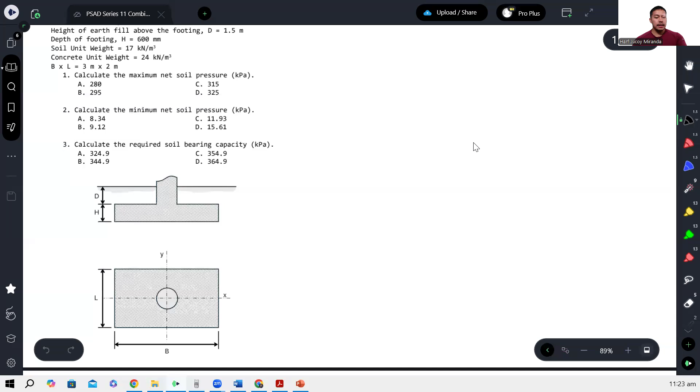For the dimension, it is 3 meters by 2 meters. This side is 3 meters, this side is 2 meters.

The first question: calculate the maximum net soil pressure in kilopascal, then find the minimum soil pressure and the required soil bearing capacity.

Actually, this is just an application of the combined axial and bending formula from strength of materials, to find the maximum and minimum soil pressure.

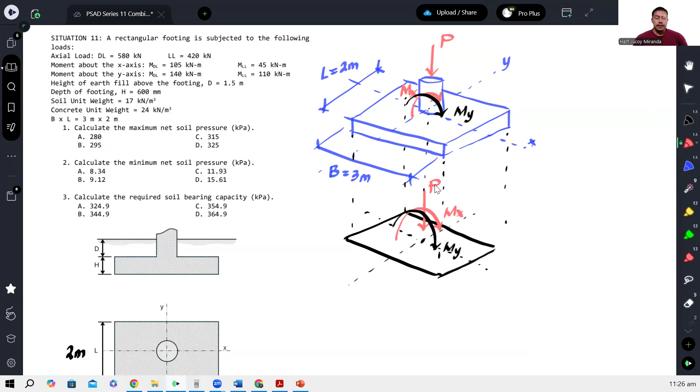So, well, that is just a visualization.

But if we look at our combined axial and bending formula, the stress equals... our sign convention here is positive for tension and negative for compression. So we have force over area due to the axial action, plus or minus the bending moment terms.

So we have bending moment Mx. When bending is about x, your measurement of c is along y. And when bending is about y, the measurement for c should be along x.

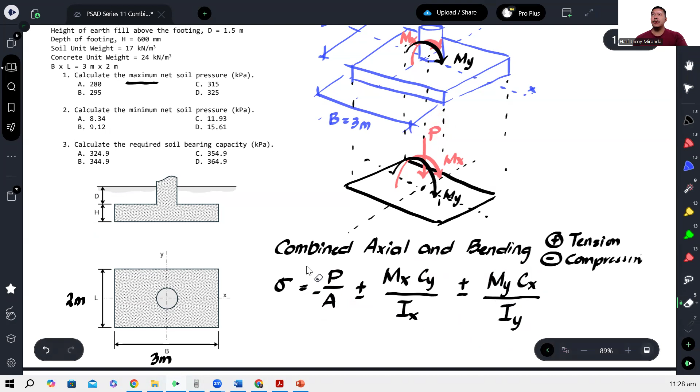Ito yung compression side, tapos ito naman yung tension side. Kapag naman ang pinag-uusapan natin is moment about X, ito naman yung compression side, ito naman yung tension side. Ibig sabihin, this is under compression, itong upper half, tapos yung lower half is under tension. Ibig sabihin, ang portion na kung saan parehas compression yung moment is itong portion na to. Yan yung common na puro compression yun nandyan.

Natutunan natin na sa formulang to, habang mas malaki yung C, mas lumalaki yung stress. Ibig sabihin, gusto kong malaman nasaan sa portion na to yung pinakamalaki yung C for both axes, so that we can produce the maximum compressive stress. Madali lang malaman yon kasi kung ang pinag-uusapan natin is itong moment about Y, yung C mo dapat ito sa dulo. Tapos yung moment about X naman, yung C mo dapat itong nasa dulo din. Ibig sabihin, itong dulo na to, dyan mapoproduce yung maximum stress, maximum compressive stress.

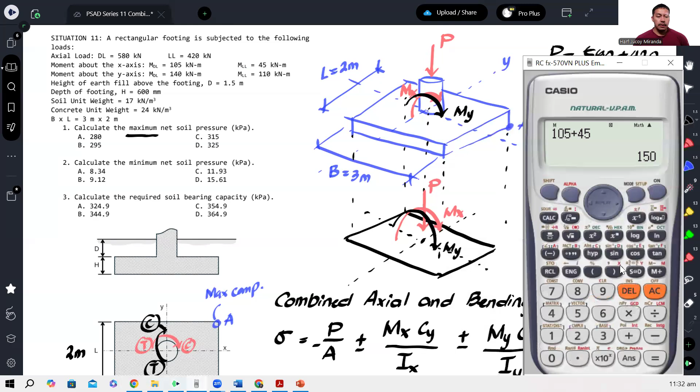I-add lang natin yun. So 105 plus 45, that's 150 kilonewton meter. And then para naman sa y-axis, we have 250 na pag pinag-add 140 plus 110, 250.

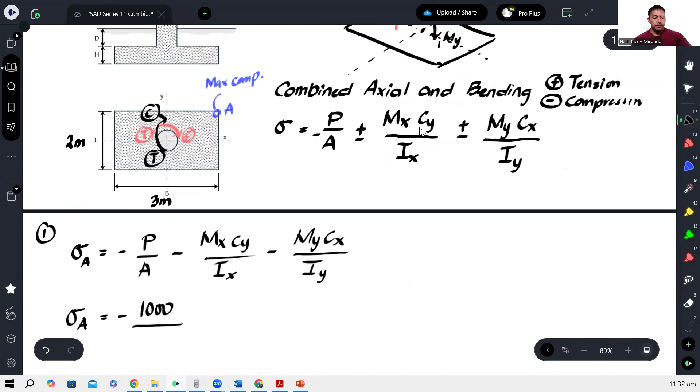Ayan. Okay, so yan ngayon yung mga i-apply natin. Alright, so lagyan na natin. Stresses at A would be negative 1,000 over area. Of course, area nung bearing area, yung contact area ng soil at nung footing, which is also yung area ng footing. So, bali ano lang, 3 times 2. Okay, minus, so kilopascal ito, kilonewton per square meter. Minus yung Mx, 150.

Kapag ang moment natin is about X, ganito lagay natin. Ito ngayon yung axis of bending natin. Ang moment natin pag ganito, ibig sabihin, yung C natin ito. Kasi ito yung corner eh. Yan yung A eh. So, ibig sabihin, yung C natin ito, yan yung CY. Di ba, ito ay 2 meters by 3 meters. So, ibig sabihin, yung CY natin would be 1 meter.

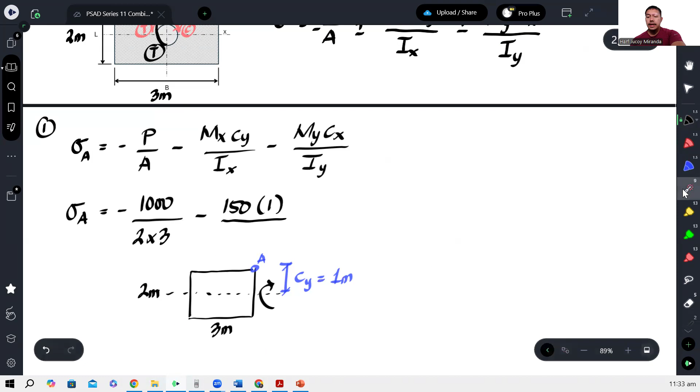1 over, okay, ano yung moment of inertia? Tandaan nyo, ang formula lang naman natin ng moment of inertia kapag rectangle ay BH cube over 12. Ang naka-cube doon palagi is yung dimension na perpendicular sa axis of bending. Ito yung axis of bending natin, so ito dapat yung naka-cube. Tapos ito yung hindi naka-cube. Yun yung tatandaan natin. So, 3 times 2 cube over 12.

Minus, punta naman tayo sa bending or moment about y-axis. Ito ay 2 meters pa rin, ito ay 3 meters pa rin, pero ito na yung axis of rotation natin. So, ito ngayon yung moment natin about y. So, ito yung corner na hinahanapan natin ng stress. So, this time, yung C natin, isusukatin natin mula sa neutral axis papunta dun sa point. So, Cx natin should be 1.5.

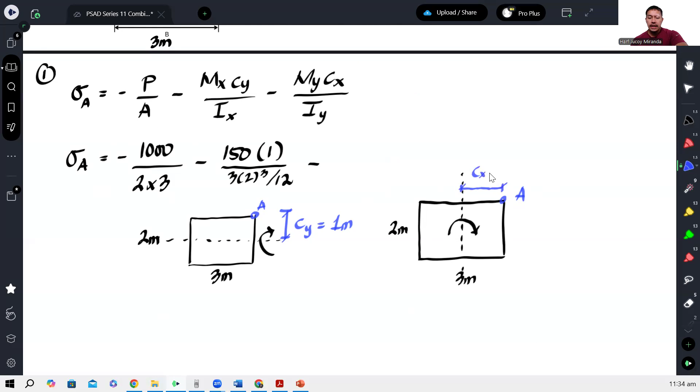Okay, so we have, ilan to? Baba ko lang to, medyo napataas. Ayan. Okay, so ilan to? So magiging ang moment natin about x about y is 250. Okay, so 250 times 1.5 over, this time, ito yung axis of bending natin. So ito dapat yung naka-cube. Ito dapat yung hindi naka-cube. So we have 2 times 3 cube over 12.

And from here, we should be able to calculate for the stress at A, which is we are expecting na yan din yung maximum stress. So, hindi ko na lang lalagay negative kasi lahat naman sila ay mag-a-add. So, para lang mabilis.

150, hindi ko na lalagay yung 1. 3 times 2 cube over 12. And then, we have 250 times 1.5 over 2 times 3 cube over 12. Okay, and that gives us 325 kilopascals.

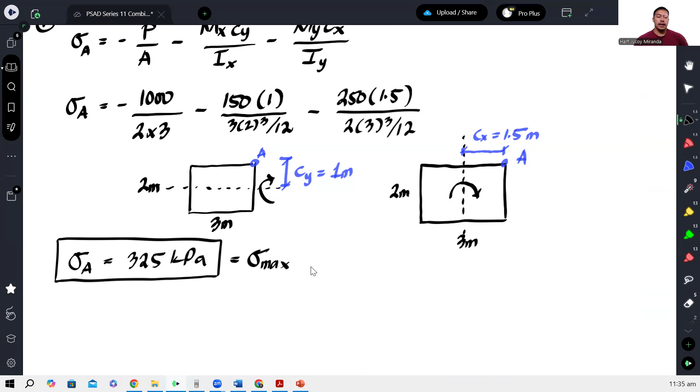So this is already our maximum stress ng soil, no? Or Qmax. Yung iba ginagamit Q, pero parang same lang 'yon. Okay? So 325. Next, calculate the minimum.

So ang minimum naman is baliktad lang nung analysis natin kanina. Okay? Once again, itong P na to, compression pa rin 'yan. Pero hahanapin natin ngayon yung corner kung saan merong tension, no? Kasi ibig sabihin kapag may tension, magpa-plus ito. So mababawas 'yun dun sa compression. Okay? At dahil doon liliit yung soil stress.

So nasaan na corner 'yon? So kung i-analyze mo for bending with respect to x, ito yung tension side. For bending with respect to y, ito yung tension side. So ibig sabihin yung common sa kanila itong corner na to. At yung pinakamalayong corner, yun yung pinaka-intense yung tension due to the bending moment.

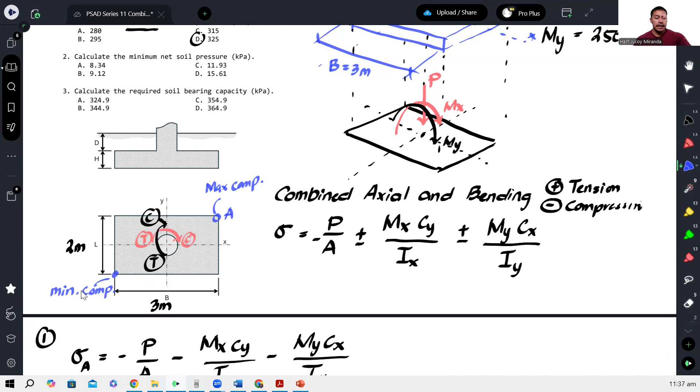So therefore, itong corner naman na to, yung i-analyze natin, no? Dito naman minimum yung stress, no? Or yung compression, kasi tension side yan pag bending, no? So tawagin natin na corner B. Okay, so this time, number 2, kumpitin lang natin yung stress sa corner B.

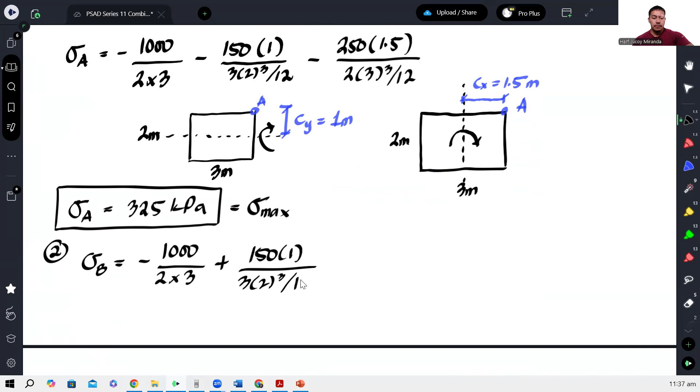Okay, actually, ito lang din lahat yun. Gagawin lang natin itong plus. So negative 1,000 over 2 times 3 plus, kasi tension na tayo dun sa B. And then plus ulit, kasi tension na rin ito dun sa B. Okay, and the answer here will be our minimum stress. Okay, so gawin ko na lang itong negative. So that gives us negative 8.33, that is under compression.

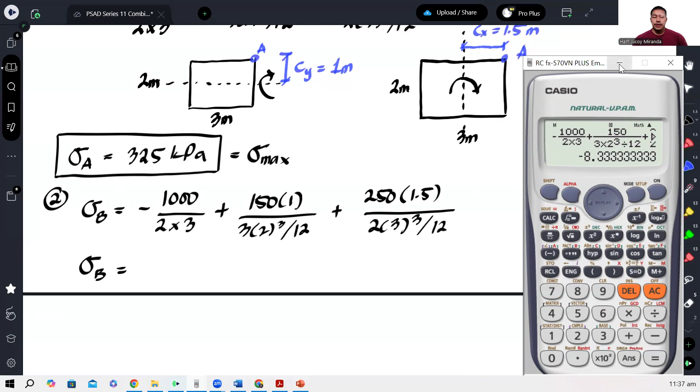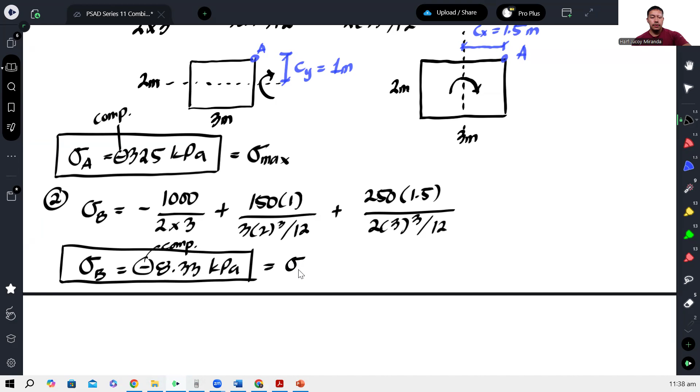So nga pala negative ito, no? Kasi ibig sabihin lang ng compression. Okay, so ito rin negative 8.33 kilopascals. Again, ang ibig sabihin lang nito ay compression. So ito ngayon yung minimum stress ng soil.

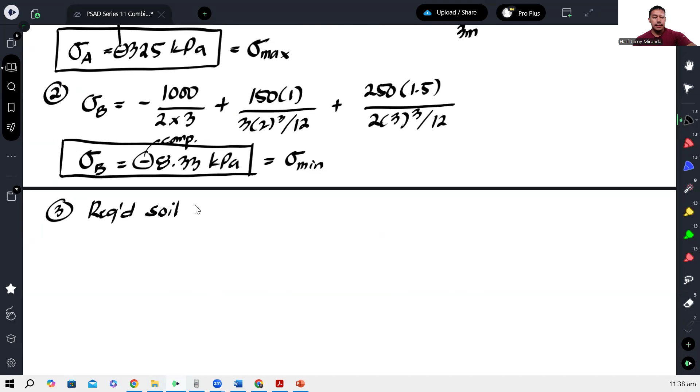Next, calculate the required soil bearing capacity. So ano daw yung required na soil bearing capacity? So for number 3, syempre, yung required na soil bearing capacity. Okay, is yung strength ng soil na kakayanin niya lahat ng stress na kaya na ita-transfer sa kanya nung footing, no?

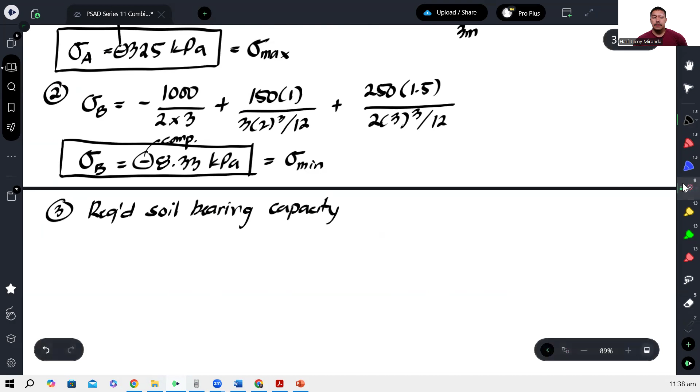Pero hindi lang nung footing kasi kailangan din kasi dito sa computation natin, no? Take note, ito mga to is mga applied. Kaya nga tinawag na net. Pag sinabing net, ibig sabihin yan yung soil pressure dahil lang dun sa in-apply na force doon sa footing. Pero di ba, etong mismong footing na to, meron din siyang bigat, no? Meron din siyang bigat yung mismong footing. Weight of the footing. Okay? Tapos, maliban dun, meron ding bigat etong soil na nasa ibabaw. Okay? Weight of overburden soil.

Okay? So, ibig sabihin, isasama natin yun dun sa computation. Pag sinabi natin na what is the required soil bearing capacity, ibig sabihin dito, ang tinatanong sa atin is actually gross soil bearing capacity. Okay? So, in short, yung sagot natin sa maximum, which is 325, dadagdagan lang natin, kasi ito, again, galing lang ito dun sa mga loads eh. Dadagdagan lang natin yan nung bigat mismo nung footing at saka yung bigat nung soil na nakapatong doon sa ibabaw ng footing.

Okay? So, paano kumpitin yun? O, di ba may unit weight naman. So, if you remember, gamma times depth lang yan, no? So, ang depth nito ay 1.5 according to the problem. Tapos, ito naman ay 600 millimeters or 0.6 meter. So, i-add lang natin yan.

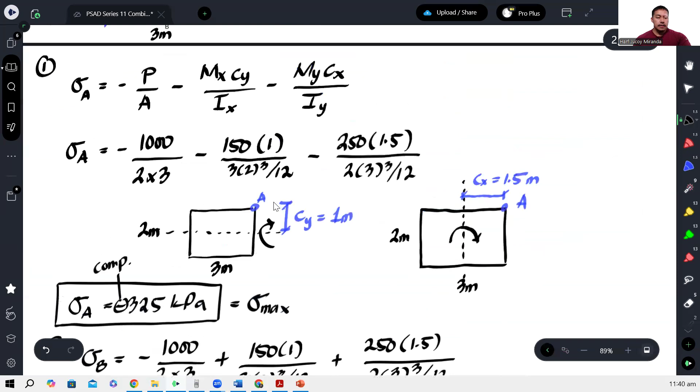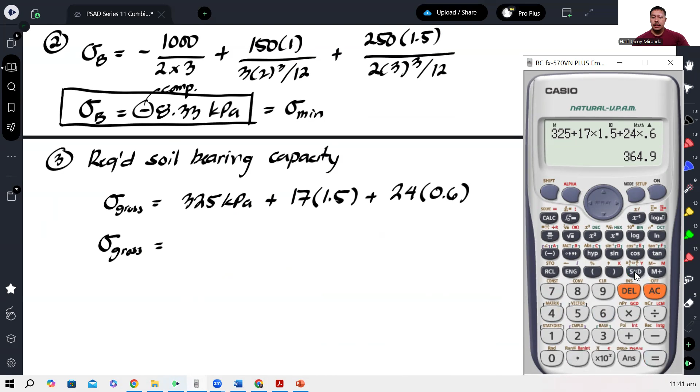So, number 3, yung gross soil bearing requirement would be yung 325 kilopascals plus, okay, para dun sa overburden soil, ang unit weight ay 17 so gamma H. 17 times 1.5 plus yung sa concrete naman 24 times H, which is 0.6. So meaning this is our required soil bearing capacity: 325 plus 17 times 1.5 plus 24 times 0.6. That gives us 364.9 kilopascal.

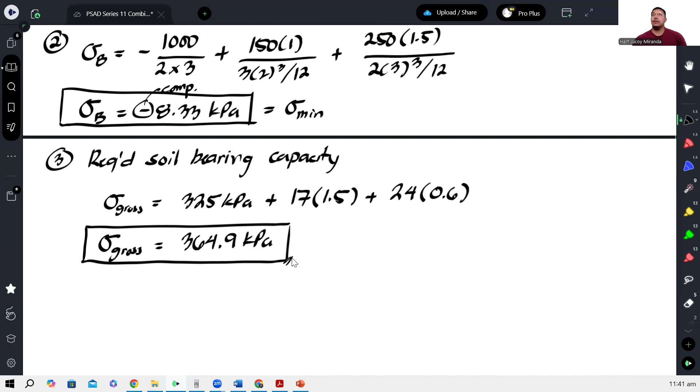So ito ngayon yung required natin na gross soil bearing capacity na kung saan yan yung i-compare natin dun sa allowable soil pressure. Okay? Which is hindi naman yung tinatanong. So that means letter D lang yung sagot natin. Okay? 364.9. Alright? So, that's how we solve this problem.